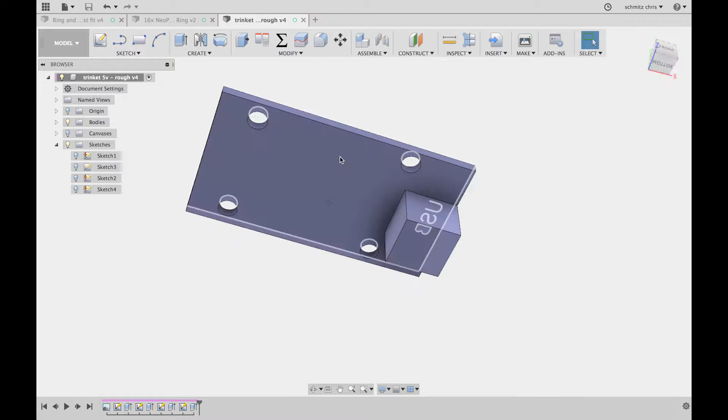So I can flip back over to Fusion. I'm bringing in a model by the Ruiz brothers for the NeoPixel ring, and then a model for the Trinket with the JST connector that I mocked up really quick. So I'll insert both of these into my current design, and then once they're in, I'll go ahead and position them real roughly just to make sure that everything is on the plane that I plan on working on so I can start sketching stuff out.

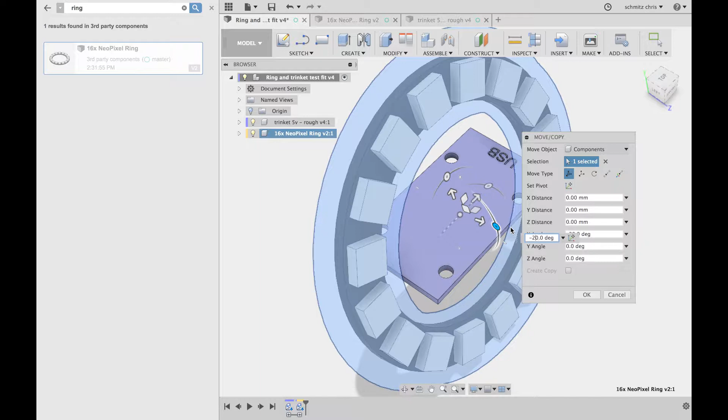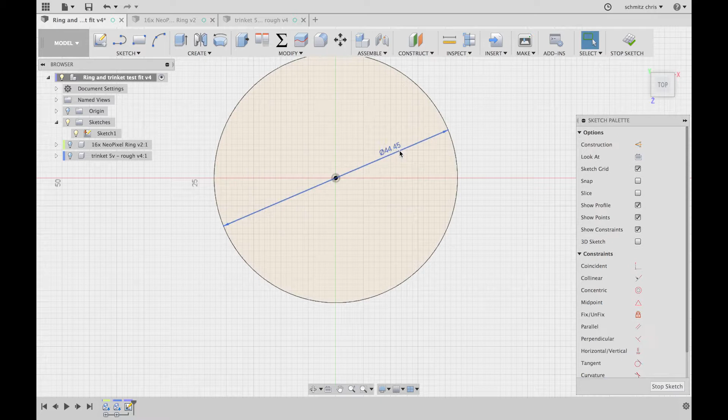So once these are placed, we'll rotate things around and then hide it all and start sketching it out. So the first thing I'm going to do is sketch the base for the ring. Sometimes I'll go by the model measurements, but in this particular case, I'm going to take the inch measurements provided by Adafruit and use those. Fusion's really good about converting inches into millimeters and vice versa, so I can put the actual inch measurements in even though I'm using millimeters.

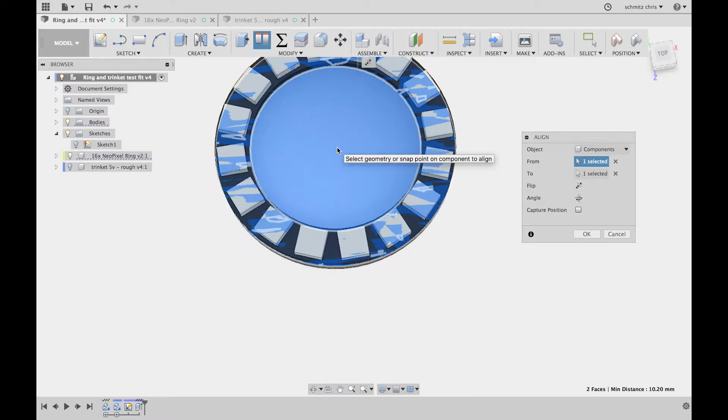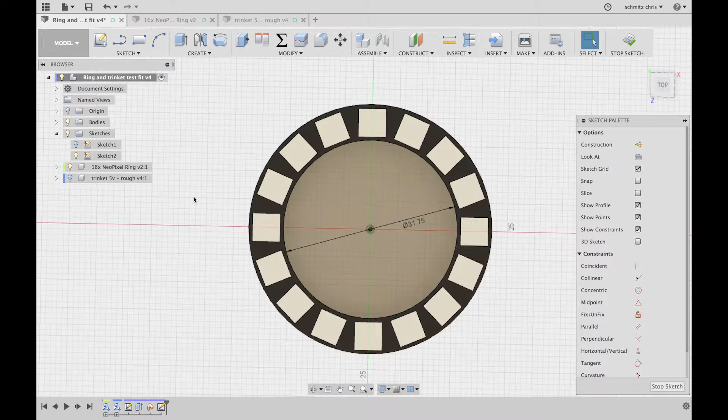So I'll pull the ring up specifically so I can center it with the part that I sketched out, so that as I'm drawing this stuff out, the pegs should line up pretty flush with the model itself. So I'll go through and create a new sketch and draw out the inner diameter of the ring. So this is the path that I'm going to put the pegs across, and we can see now that it matches up with the interior of the ring.

So I'll hop in here and draw a circle for the pressure peg. So I put in just an arbitrary value for the initial diameter size, but now I'll go through and move that out to a parameter.

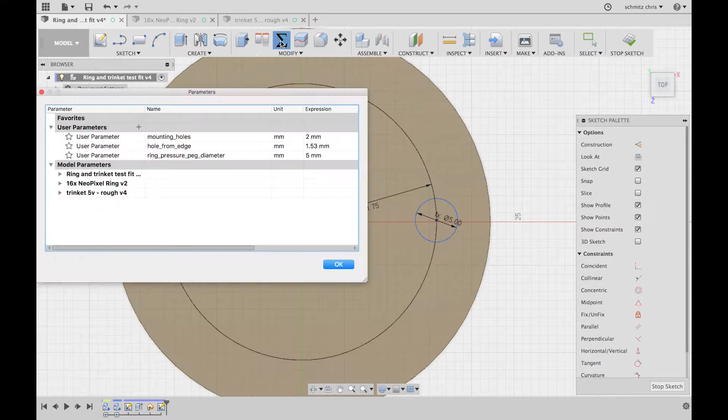So moving it out here to a parameter means that later I'll be able to go through and adjust the size of the peg without having to actually go through and edit the original sketch. It becomes really easy whenever you're doing parametric design like this to make adjustments as you find things need to be adjusted once you print out the actual part. So just going through here to show that I can adjust the size of the pegs as needed.

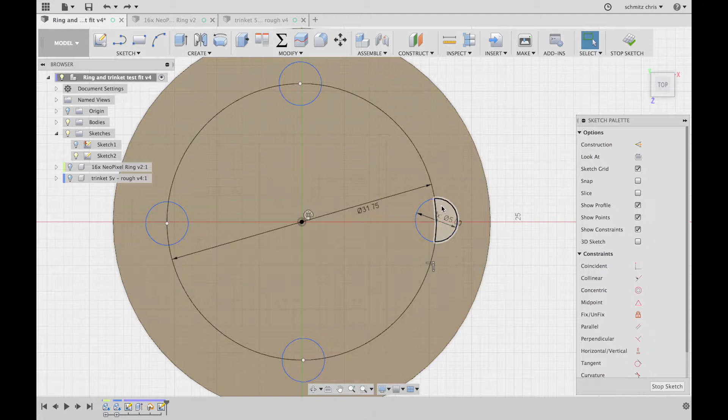So now that I've drawn the first peg, I want all the pegs going around it to be the exact same size. So I'll do a pattern across the circle. I'll make 4 different pegs so that they get placed out evenly. And we can see that the pegs are not nailed down just yet, and that's because they haven't actually been attached to something. So I'm going to draw out a construction line that I can use to align the pegs to the rest of the circle. And I have to draw it out again so that I can nail that line down to the rest of the circle.

So we got that line, and then we can see the line's not nailed down, so I'll make sure that that line is horizontal, which will change its color to black. And now I can put a coincidence point in one of the circles and align it to the line, which is aligned to the overall part. Now everything is black. So now I can go through and start extruding the pegs.

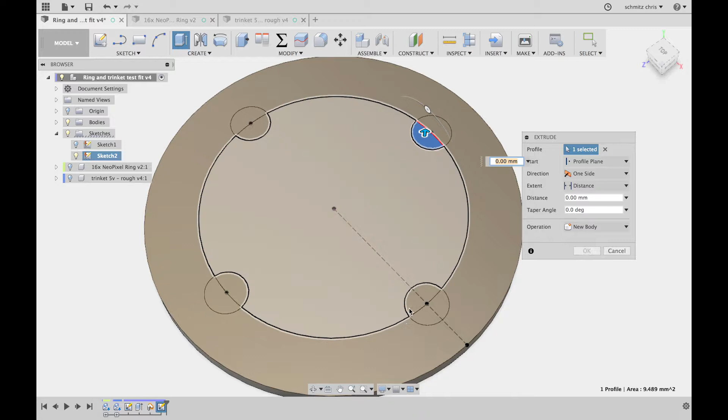So I'll grab each of the pegs and pull them up. And this was a goof up. I didn't actually grab each of them, so I can hop back into the feature, make sure that I grab the rest of the pegs, and pull them up into 3-dimensional space. And we can see that it lines up really nicely with the inside of the ring diameter.

So now let's hop back in and draw the standoffs for the ring itself, so that it's able to sit up from the base of it. So I'm just going to draw a 45-degree angle for the outer part of the arm and mirror that so that I get a nice V shape. And then I'll draw another 45-degree angle for the inner part of the arm. Get that dimensioned out. And then I'll go ahead and mirror that as well.

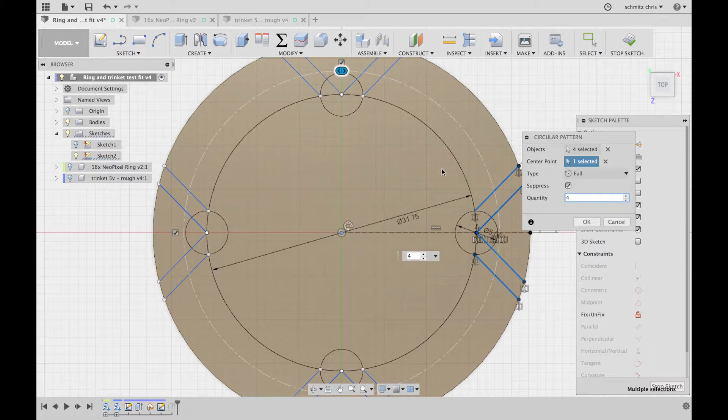And then these arms, I know I want to pattern around the same circle that I did for the initial pressure peg. So I'll grab each of the sides of the arms, I'll select the center point, I'll make the quantity 4, and they'll match up exactly with the previous circle diameters. So now in a new feature, I can go through and extrude these parts out.

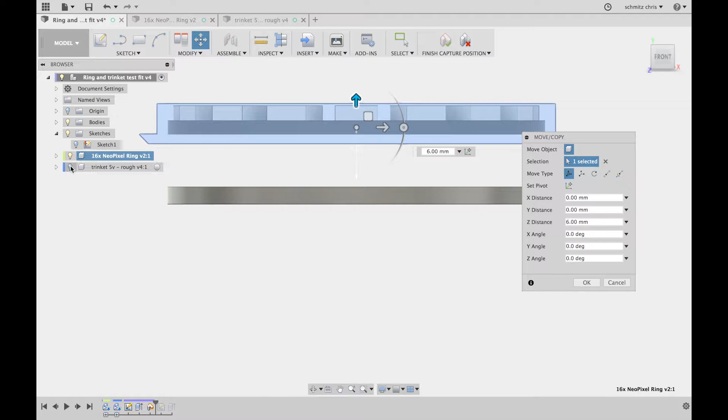And this is where I put the ring flush against the base, but really I want it to stand off just a little bit. So I'll go ahead and pull it up, make sure that I have enough room. I have to go ahead and pull the Trinket up because really I want the NeoPixel ring to be just slightly above the Trinket so that the Trinket has room for its JST connector, but then the NeoPixel ring isn't potentially going to hit the corners of the Trinket.

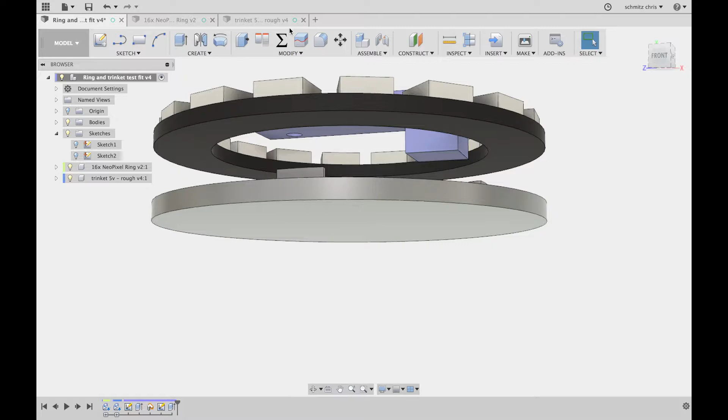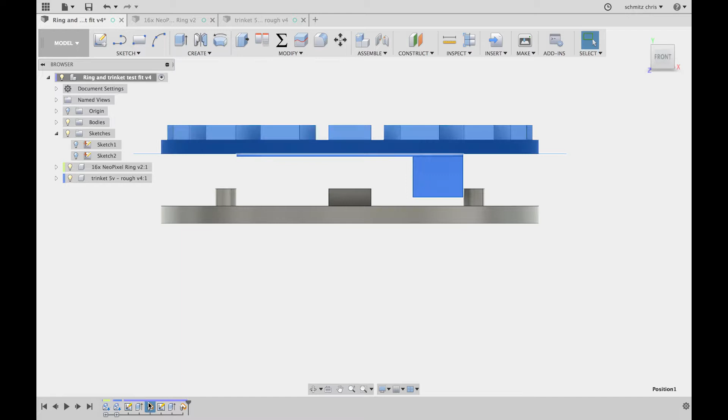One of the things that I've learned from dealing with Fusion 360 is kind of what the capture position tool does, and really it does just what it says. It captures the position of all the parts at any given time. I had an incorrect assumption for a while that the capture position captured it for whatever part you're actively working on, but really it just captures the position of all the parts at a given time.

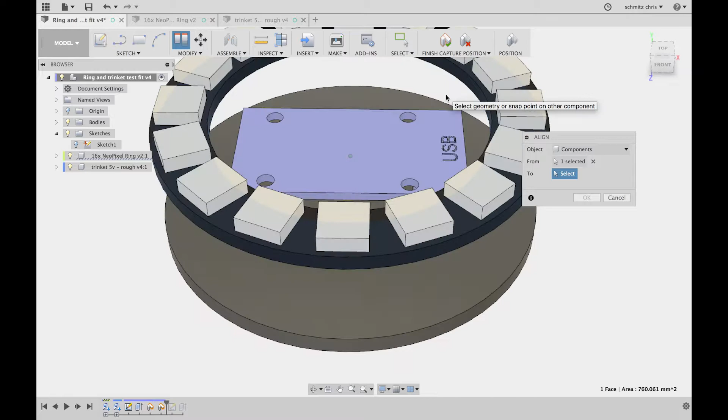So I needed to go through here and reorder those captures. I really could probably just remove one and make sure that everything is positioned the way I wanted it, but I felt like leaving this in because it shows a nice example of manipulating the timeline to get things positioned exactly where you want.

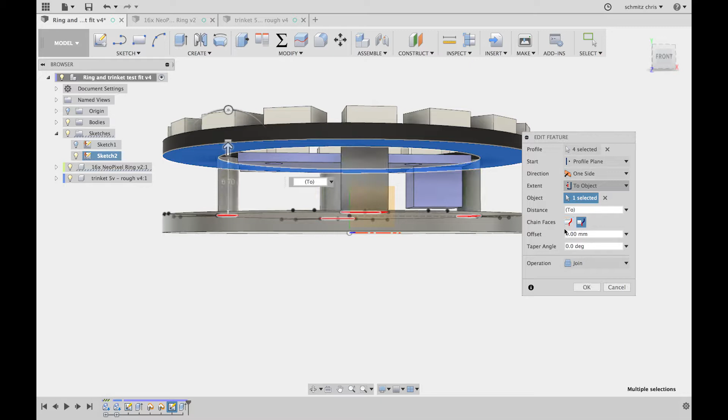So now I've got the Trinket spaced just slightly above the base. I've got the ring positioned slightly above the Trinket, and now I can extrude those pegs out to the bottom of the ring base and then offset them so that they're slightly above the ring, which means that they'll be able to hold the NeoPixel ring in place. So that's looking good.

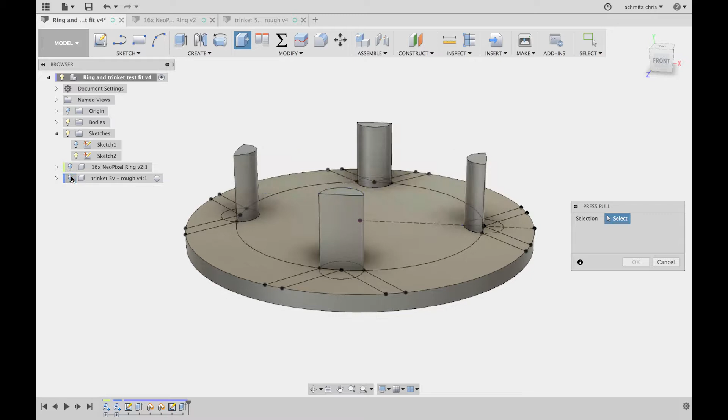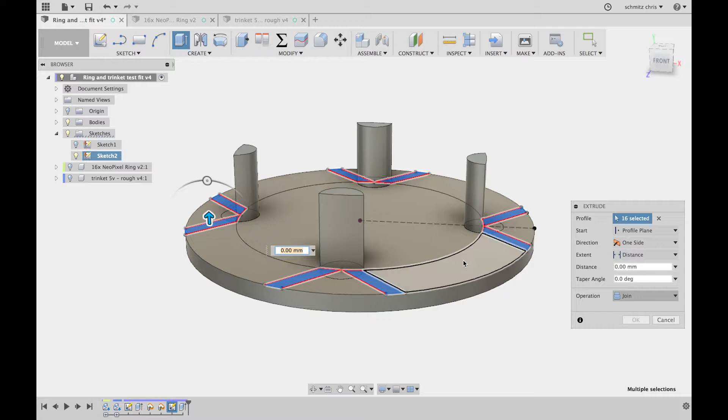And now from here, the next thing I want to do is pull up those standoffs. So I'll go ahead and grab all the pieces of the standoff so that I can start pulling those up with the extrusion. So something to point out as I'm going through here, Fusion 360 is really great at allowing you to select pieces to interact with through other pieces, as long as you have the select through feature turned on in the select box.

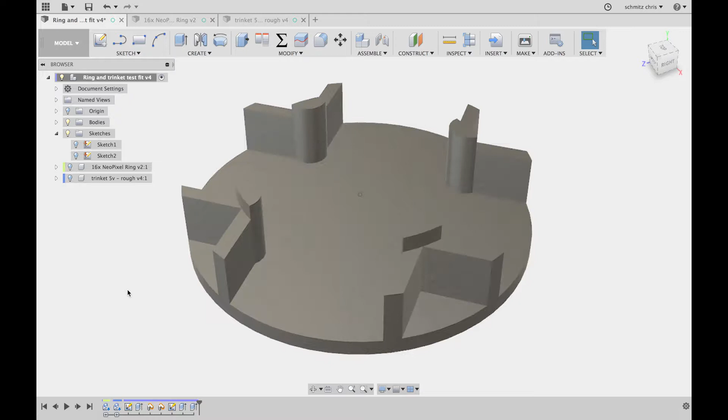So I'll go ahead and pull these up a little bit and then switch over to To Object so I can pull the standoffs to the bottom of the NeoPixel ring. So now with those pulled up, we'll go ahead and hit OK and check out what we've got. So move everything out of the way, and these are looking pretty good. We'll have to do a test print of this to make sure that they line up, but I'm happy with the standoffs here. So now we'll go through and start moving the trinket into place.

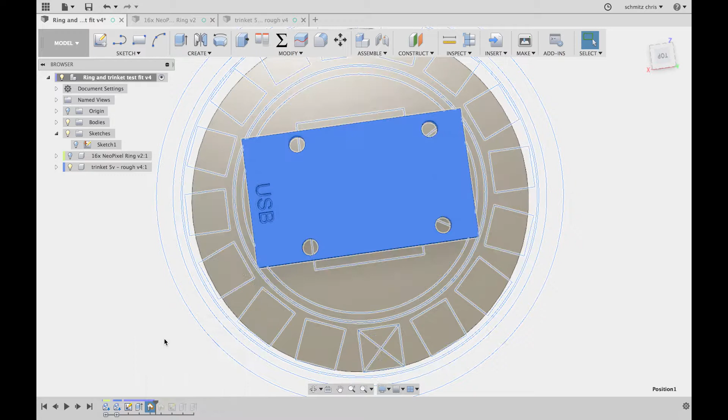So there's a little bit of a goof up here that I kind of mentioned earlier as far as how capture position works, and I didn't totally get this until just now. So I've got those two capture position features next to each other. I thought that they applied to a body part specifically, so I went to the first one and moved this trinket. Once I finish the capture, the whole thing doesn't quite end up where I want.

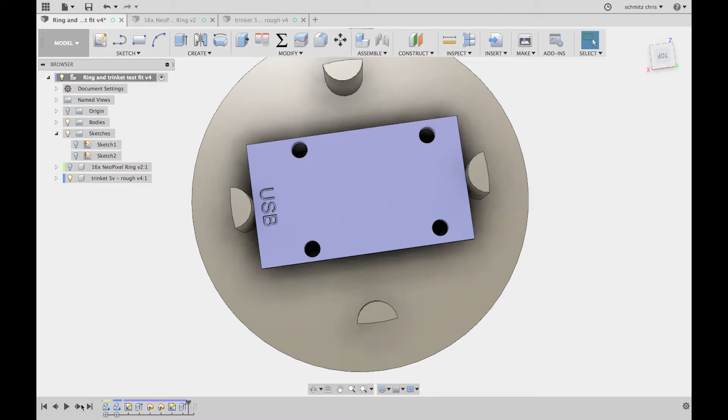So whenever I go back to the first capture position, it looks good. When I go back to the second one, it's back to the place it was before, and that's because the second one captured the trinket already moved. So I'll go ahead into the second one, move the trinket to the 45-degree angle, and now everything's good. And really, I could probably just delete the first capture position feature, but for now I'm just going to leave it in.

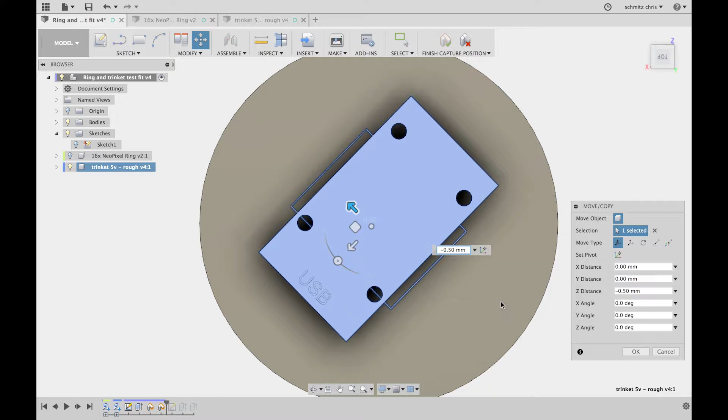So I'm moving the trinket over just a little bit to kind of align it a little bit better in the middle of the NeoPixel ring. So now that that is moved over, that position is captured, I'll put up the ring, and it looks like the spacing is really good.

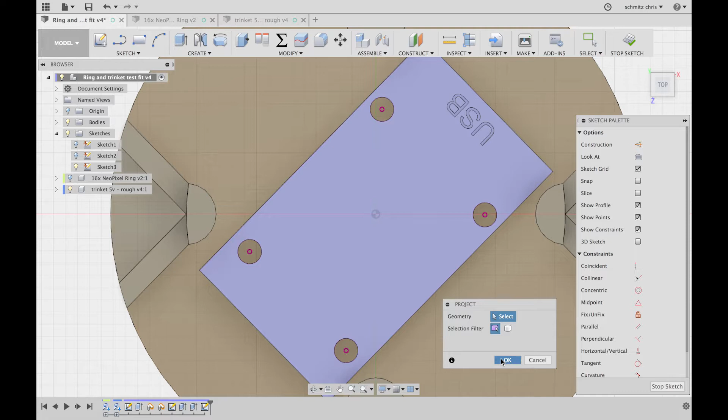So from here, I'll go ahead and create a new sketch, and these screw holes are positioned exactly the way that the diagram from Adafruit is drawn, using the same measurements, the same way we did with the NeoPixel ring. I just did this before. So I'm just going to project the hole positions onto my sketch. So now that I have these, I'm going to expand the screw hole out so that I have a wall to actually screw in.

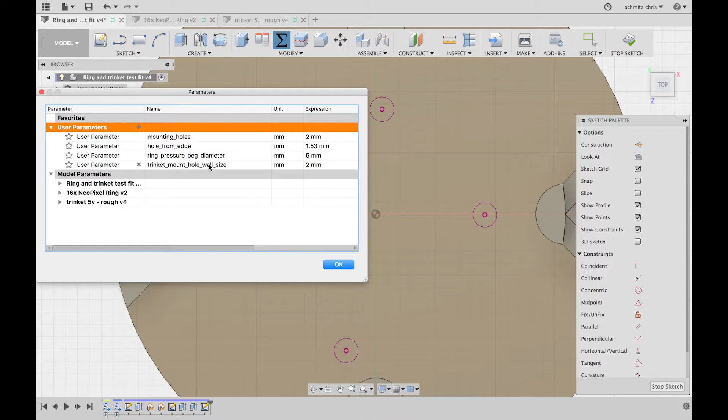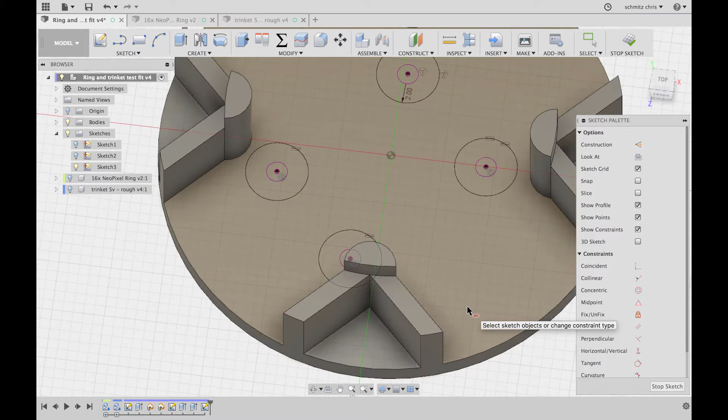This is a point where I'm putting a wall, and after I print it out, if the screws are fitting too tight or not tight enough, I may come back here and put a tolerance on the inside of the mount. But for now, I'm just going to put a 2mm wall on each of these. So I'll come in, grab the equal constraint, go to my first one that's dimensioned, and then make sure that each of the wall diameters match. So if I come back in here and change the wall diameter to something other than 2, all of the walls will change at the same time.

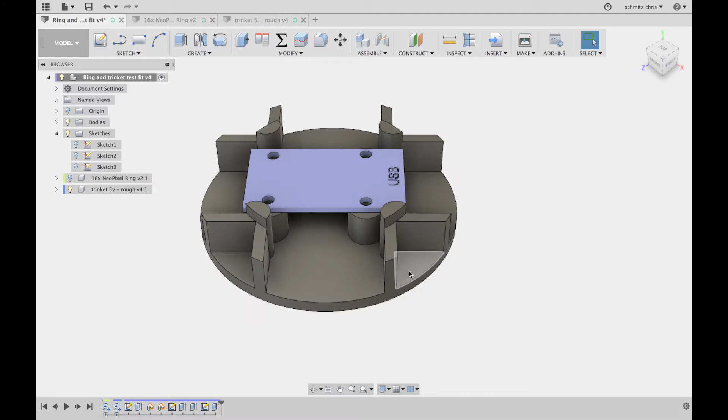So let's go ahead and extrude these up to the bottom of the trinket. And remember that I positioned the trinket so that it is aligned with the bottom of the mount and then offset up by a millimeter. So whenever we pull the standoffs up, they will meet up with the bottom of the trinket, and when we print it out, theoretically they will meet up with the bottom of the trinket and give us enough space for our JST connector.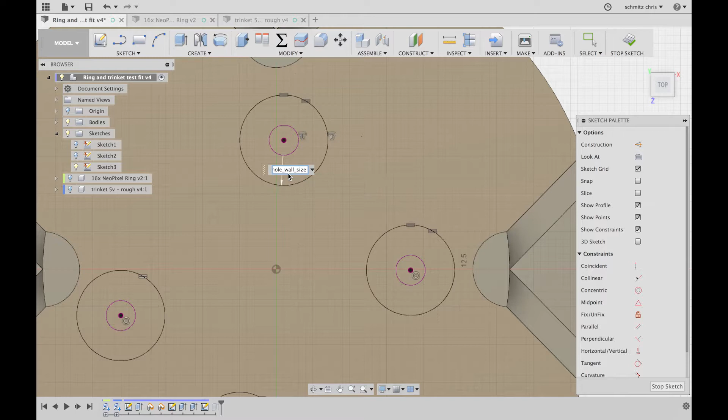So here's where I had already gone through and created a parameter for the wall size, but if you notice, while I was designing it, I didn't actually use that parameter. So I'll come back in, edit the sketch, and replace that 2mm with the parameter. And now, because I used that equal constraint, I can pop up the parameters, change the value, and then whenever I switch it back to 2, we'll see them all pop up to 2.

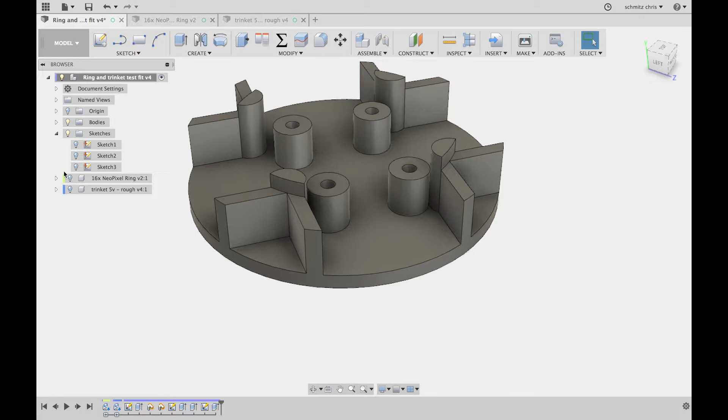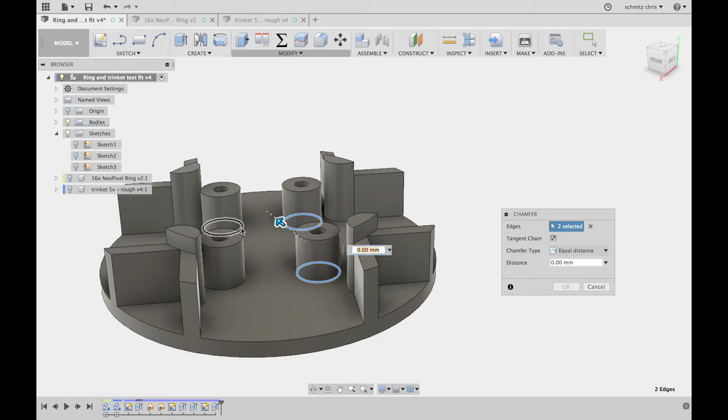So from here, the last thing that I'd want to do is to put a little chamfer around the screw mounts. Adding a chamfer to the bottom of those mounts will increase the surface area that the mounts are actually using to hold onto the bottom of the plate. In previous designs, I've not added that chamfer, and as soon as you start torquing the screw, sometimes the mount, especially if they stand this far off of the bottom, will actually just rip off of the bottom.

So we'll add a couple of chamfers here. I'm just going to add an arbitrary 1mm one. You'll notice that one of them overlaps just a little bit with the ring standoff peg, but I'm not too worried about that now since we're 3D printing.

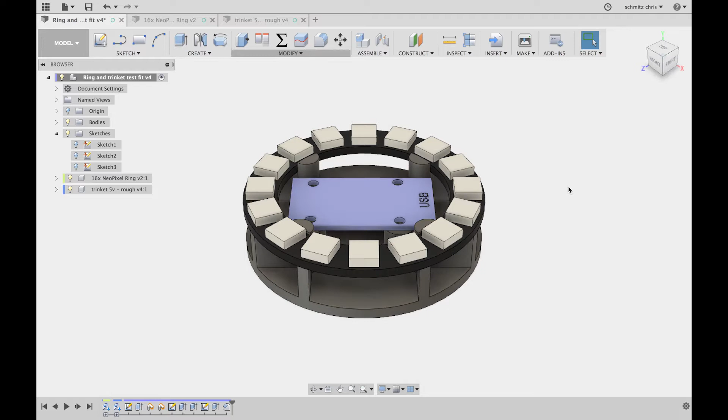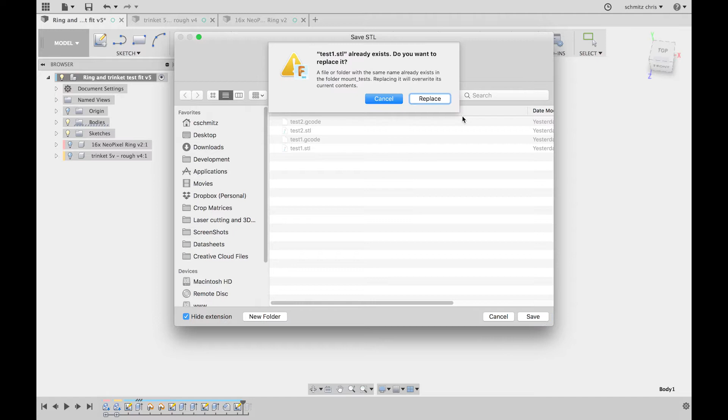Now we can hide all our pieces and start playing on sending this out to a 3D printer. I'll hit make, select the body I want to export out to STL, and save this to my working folder. I've already done a couple of these, so I'll just overwrite the previous one and name it test1.

Then we'll switch over to Slic3r, which is the slicing software I've been using. There's a Prusa specific edition, so it's tuned to the printer I'm using. I'll bring in the model and rotate it on the x-axis to get it flat with the bed, then go through and take a look at the settings I want to print this with.

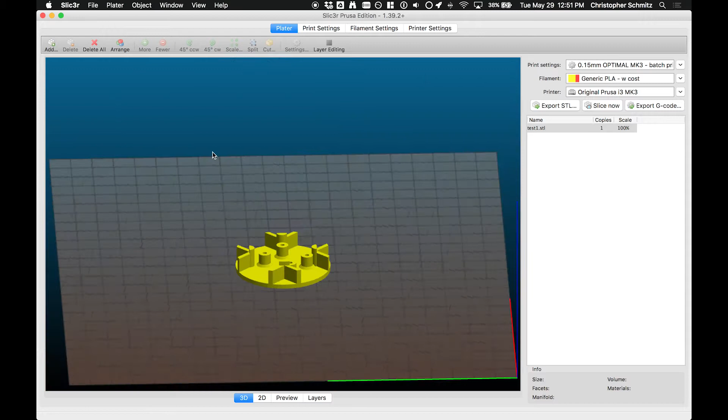The first thing I'll do is slice the model and switch over to layer view so I can get an idea of some of the stuff I want to change. I'm going to drop the infill on this one since it's a test part, we don't actually need to fill it in much at all, and change some of the patterns just because I like how some of the infills and bottom patterns work.

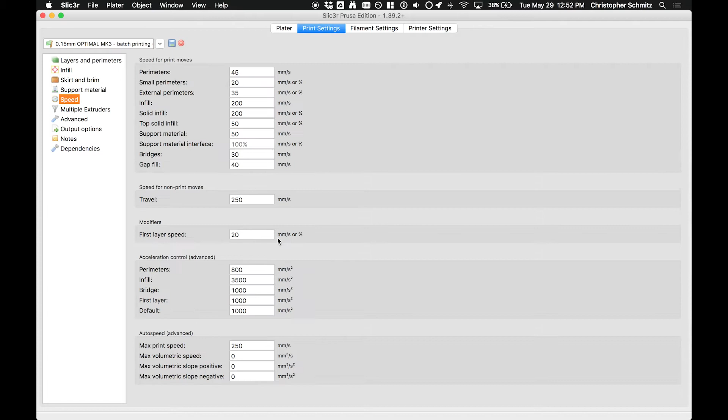I'm going to print it at a slower speed so the first layer adheres well. All the rest of these settings look good, so let's re-slice it and take a look. Now we can step through the layers, check that the infill looks the way we want and that there's nothing funny about the various layers that get printed, and it looks good. So let's export the G-code and send it to the printer.

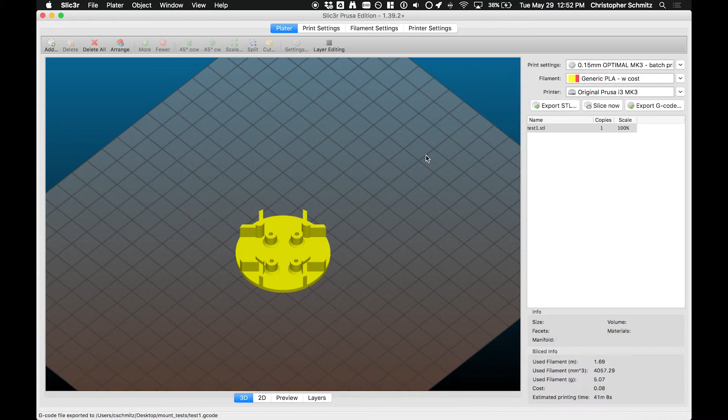Here's the first test print. All the standoffs and the pegs came out looking really good.

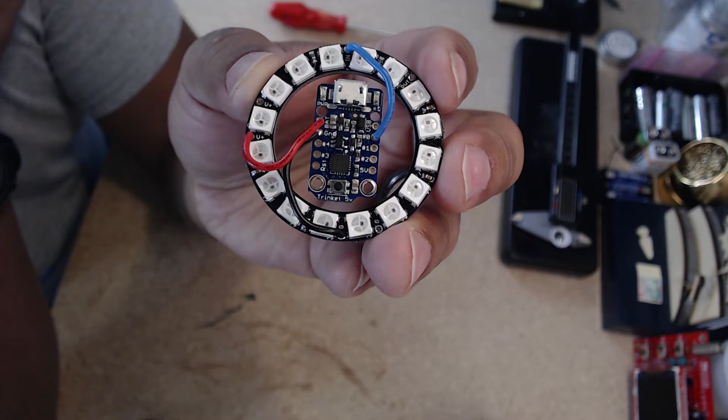So now I'm going to throw on the soldered NeoPixel ring and trinket. When I first started this project, my plan for the NeoPixel ring was actually to have it flush with the bottom of the print, and only later did I decide I wanted the ring raised above the trinket to account for this JST connector. So the wiring's going over the top, but I think before this project's over, I'm going to rewire the rings so the wires come up from the bottom and none of the LEDs are blocked.

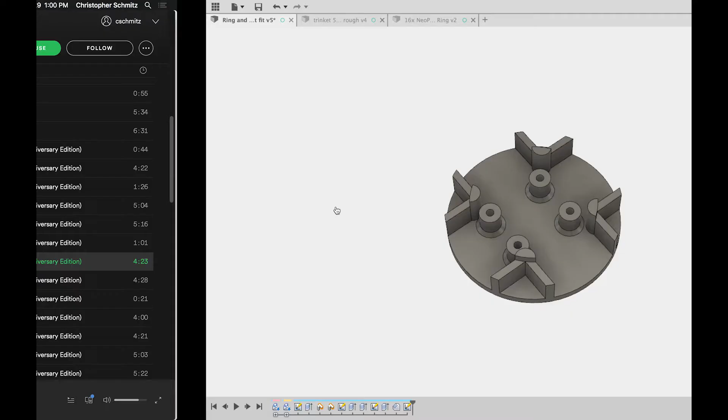Back in Fusion, I'll flip the body over and create a new sketch. I know the diameter of the dome is 60 millimeters, so I'll draw out a hexagon and give it a radius of half that.

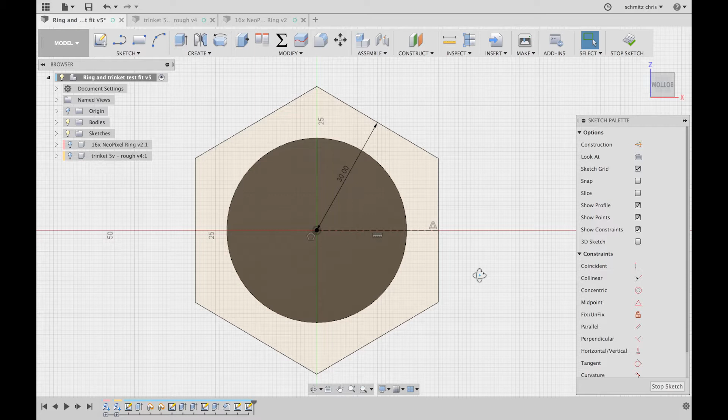Now I want to nail down the hexagon so we get rid of those blue lines, so I'll draw a construction line and make it horizontal, which will nail down the hexagon and give us those black lines. Now we can extrude it up to the top of the base so that if we ever change the height of that base body, the hexagon will come with it.

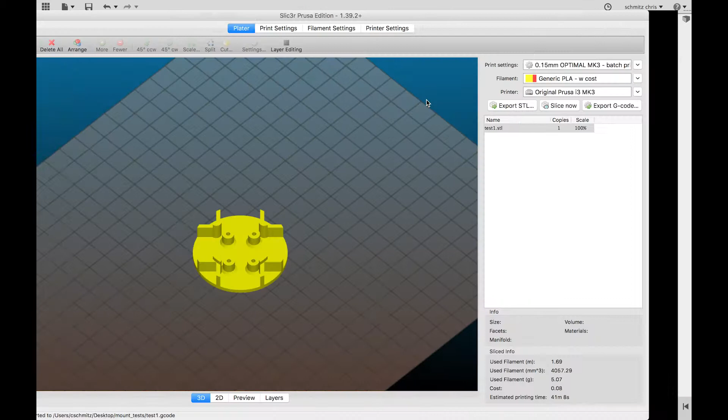So let's send it out to the slicing software. Flip over to Slic3r and blow away the old model so we can keep all our old settings. We'll align it, center it, slice it, and take a look at the layers. Then switch over to preview and slide it up and down to get an idea of what the print's going to look like, and send it to the printer.